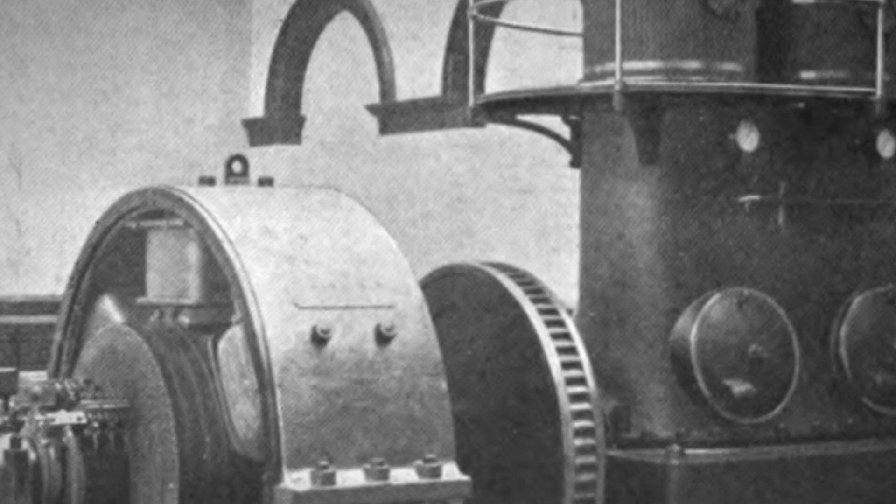In the spring of 1864, the Swiss Federal Council gave its approval for a project that promised to transform both a mountain and a nation's expectations of what machines could do. The plan called for a new kind of steam-powered engine, one that could cut directly through rock, timber, and anything else standing in the way of the St. Gallen-Toggenburg Railway. The men behind the machine were not local.

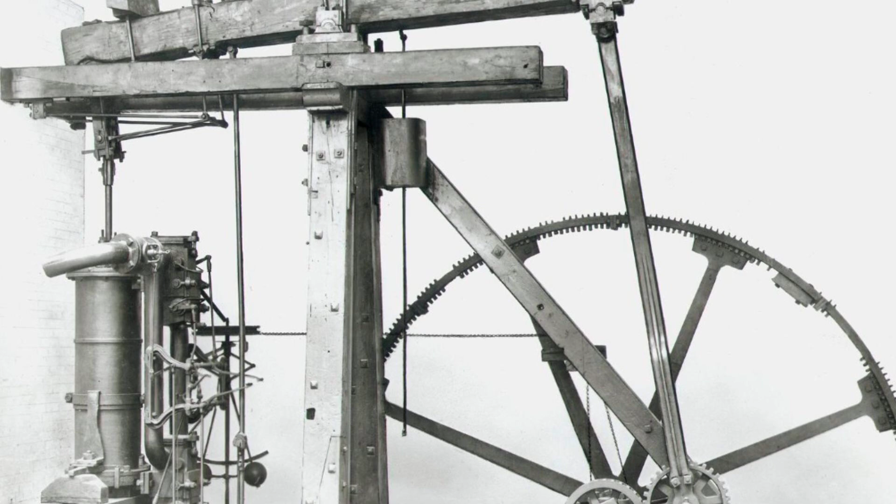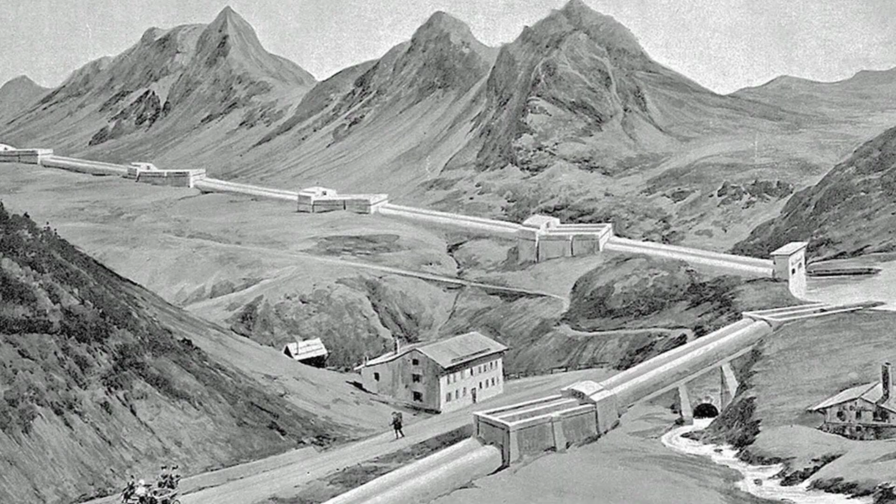James Miller, born in 1823 in Newcastle upon Tyne, brought years of experience with rotary steam engines from Britain's coal fields. Karl von Barton, born 1840, was the son of a German-Swiss family with a reputation for pushing engineering boundaries. Both men saw the mountain not as an obstacle, but as a challenge worthy of their ambitions.

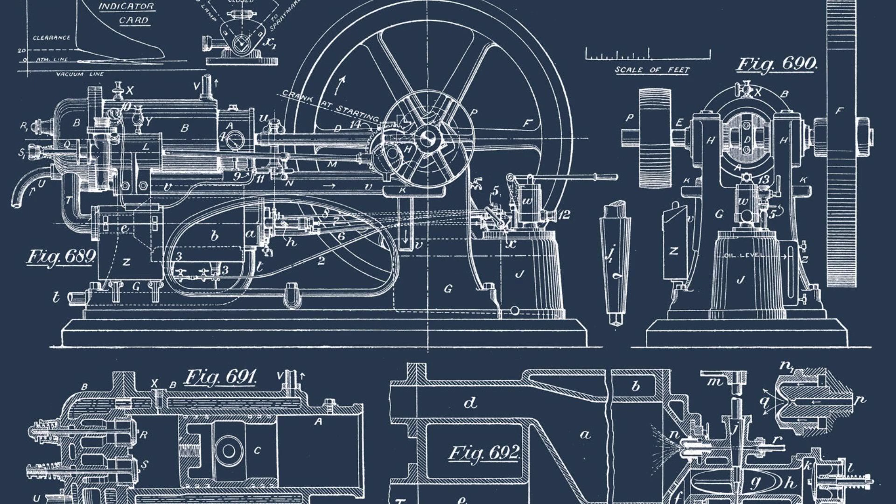Government records from that year show the urgency. The railway was falling behind schedule, and the cost of manual tunneling was spiraling out of control. The council's mandate was clear: find a way to cut labor time and risk, or risk losing the entire project. Miller and Barton responded with a design that looked more like a weapon than a tool.

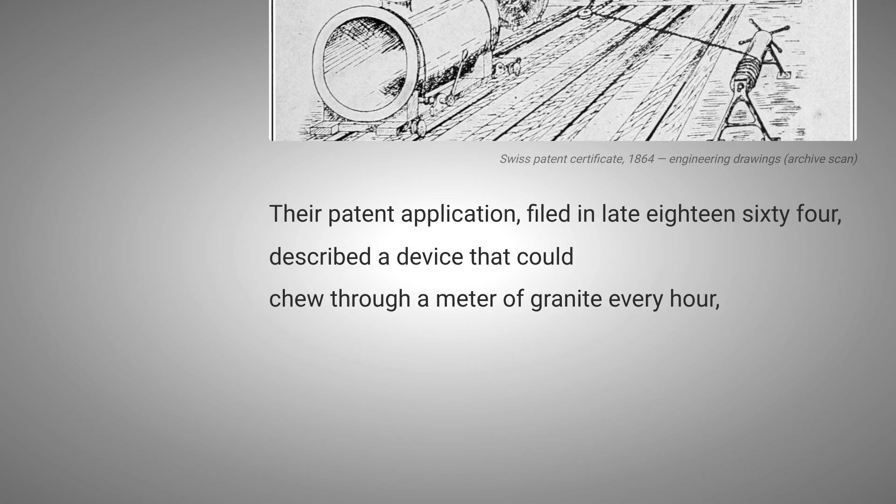A 30-horsepower double-acting steam engine, its boiler rated for 80 pounds per square inch, driving a 2-meter rotary steel blade. Their patent application, filed in late 1864, described a device that could chew through a meter of granite every hour, powered by a steady diet of coal and human vigilance.

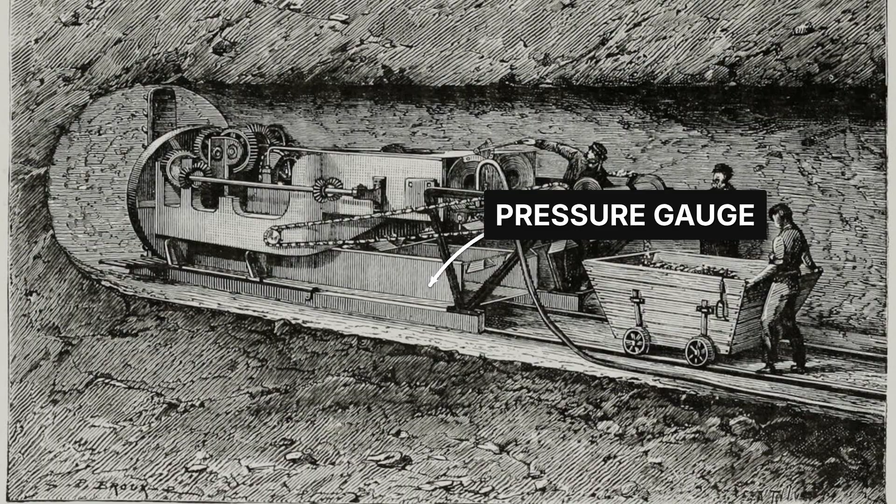On April 12, 1865, the first test took place at the tunnel's eastern mouth. The air was sharp and cold, the ground still frozen from a long winter. Miller stood by the controls, Barton watching the pressure gauge as steam hissed and gears locked into place. The blade spun up to 150 revolutions per minute, sending chips of rock and wood flying. For a moment, it seemed as if the machine would deliver exactly what the politicians had ordered.

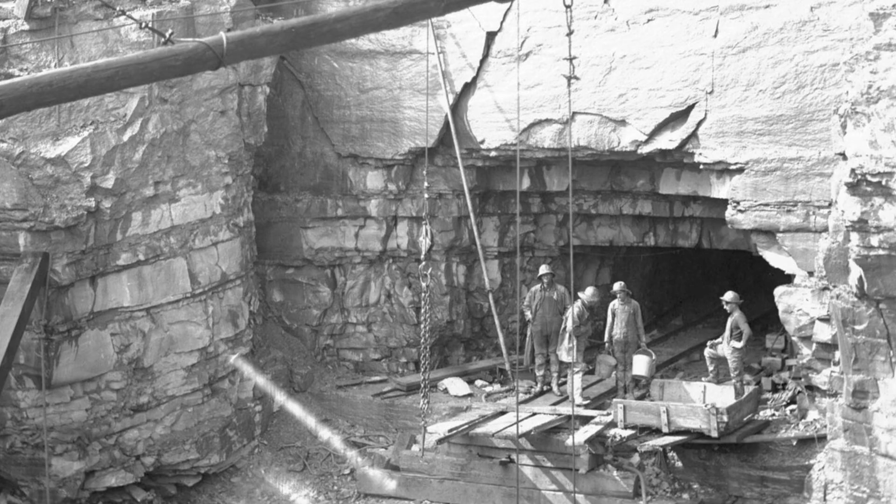But even in that first hour, the men on the ground felt the risk. The engine's roar drowned out warnings, and the exposed blade left no room for error. The promise of progress came with a cost that was already waiting to be paid.

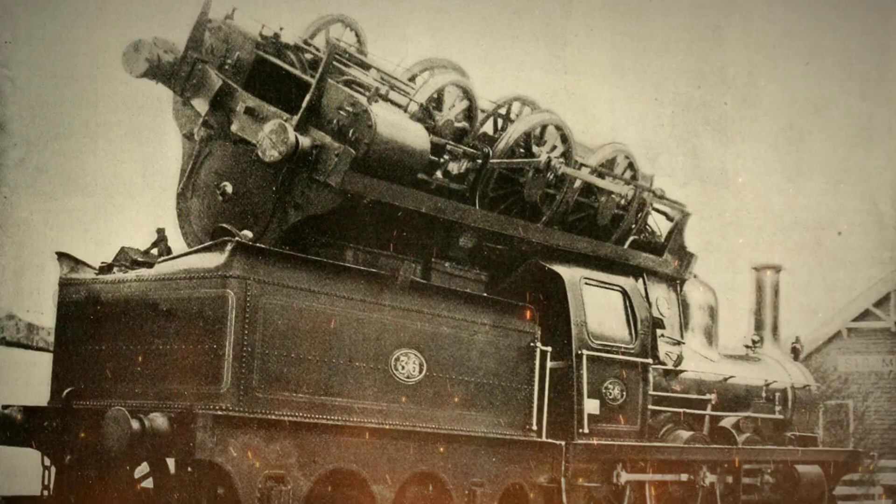On June 21st, 1866, the tunnel site fell silent for the first time since work began. The steam engine's boiler, pushed to its limits, ruptured without warning. Johann Keller, a foreman from Altstetten, was standing less than 3 meters away. The blast of scalding steam and shrapnel left no chance for rescue.

His death was recorded in the mining journal and in the hospital log at St. Gallen, where the entry reads simply: Keller Johann, age 34, deceased. Cause: crush injury, steam piston. The men who had worked beside him saw the ground stained with oil and blood, the promise of progress shattered in an instant.

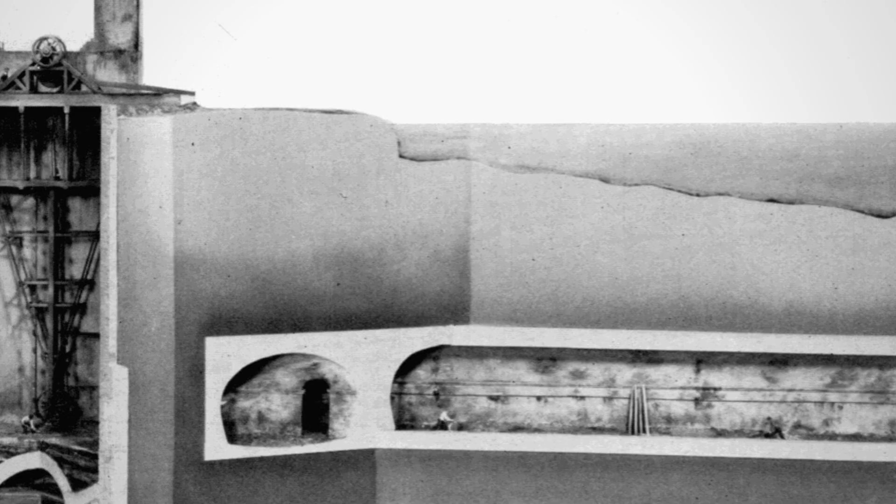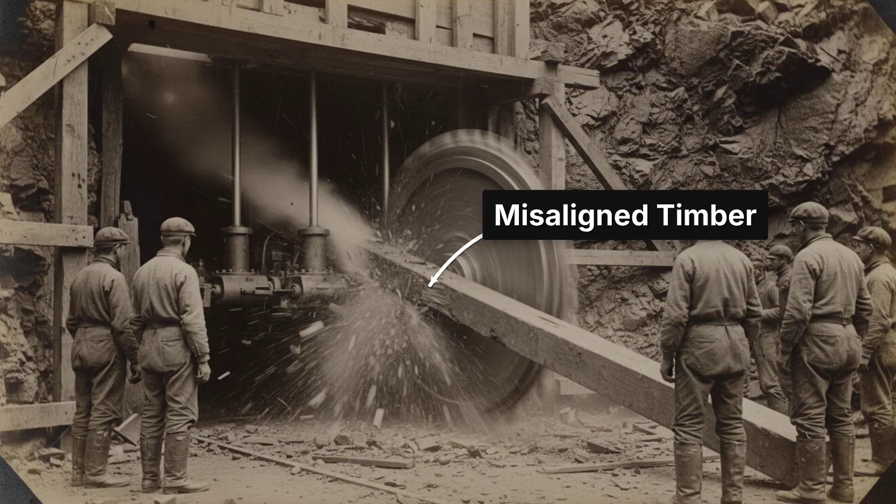The following year, on September 8, 1867, Marie Fisher brought lunch to her father, a brickmaker stationed at the tunnel mouth. She was only 16. As the rotary blade spun up to speed, a misaligned timber kicked loose. The blade caught it, sending a splintered beam across the worksite. Marie's left arm was severed at the elbow. She survived, but the hospital admission record notes: amputation required, permanent disability. Her father never returned to the tunnel after that day.

By late 1867, rumors of the machine's dangers spread beyond the valley. Mining journal entries grew darker, listing injuries by name, date, and wound. The hospital in St. Gallen filled with men burned, blinded, or missing fingers. In early 1868, the Federal Council ordered a halt to all tunneling operations. The shutdown lasted 3 months. Official records cite unacceptable risk to personnel.

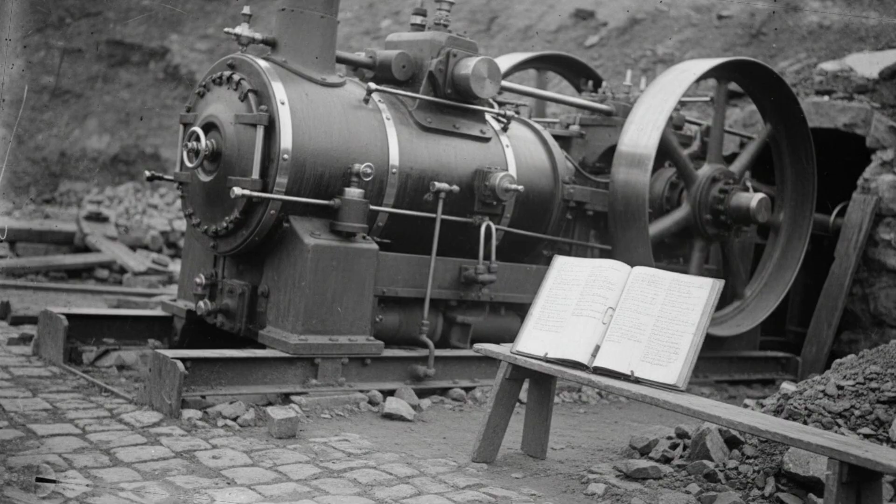Unfinished rock walls echoed with the memory of Keller and Fisher, and the promise of mechanical salvation now carried the weight of every injury logged in the company ledger. Each accident forced engineers and politicians to confront a question that had no easy answer. How many lives could be spent to clear a mountain?

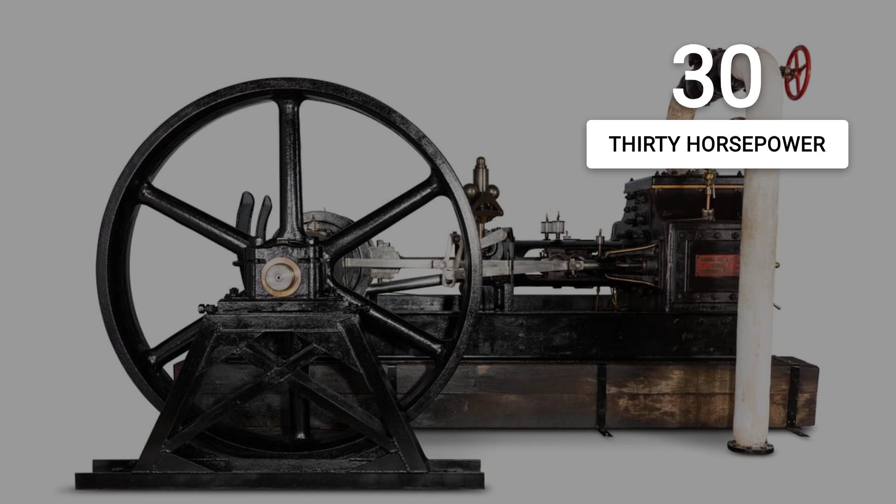A double-acting steam engine, rated at 30 horsepower, drove the operation. Its horizontal fire tube boiler, holding steady at 80 psi, demanded constant attention.

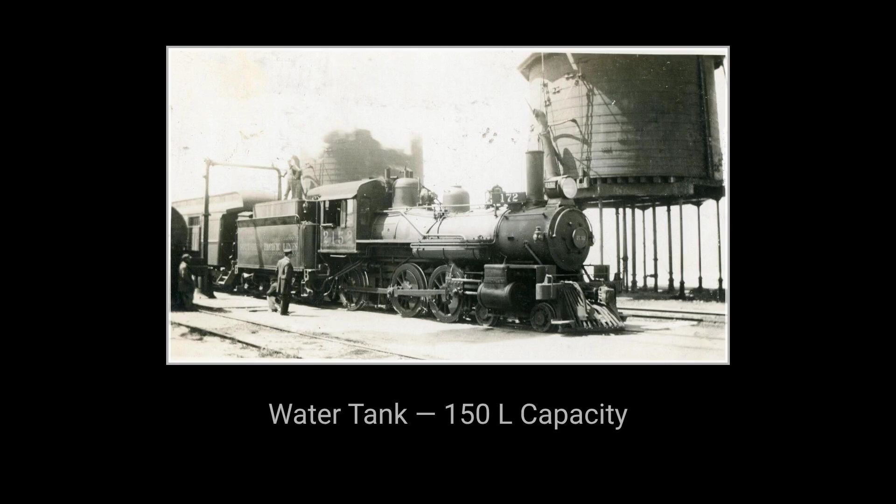Each morning, before dawn, the firemen shoveled 12 kilograms of coal into the firebox. The water tank, 150 liters, had to be topped off, every joint checked for leaks. Oil cans sat on a battered bench, each crankshaft bearing receiving 10 milliliters, measured with the precision of a surgeon. The engine's rhythm never faltered.

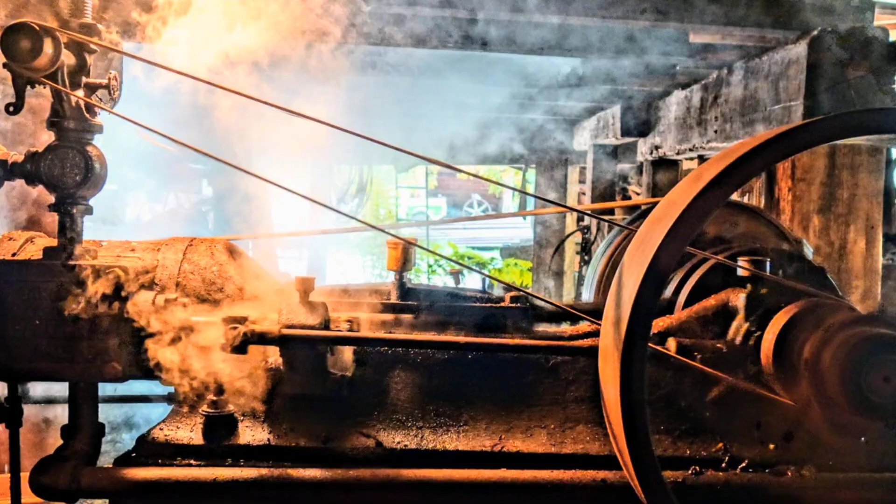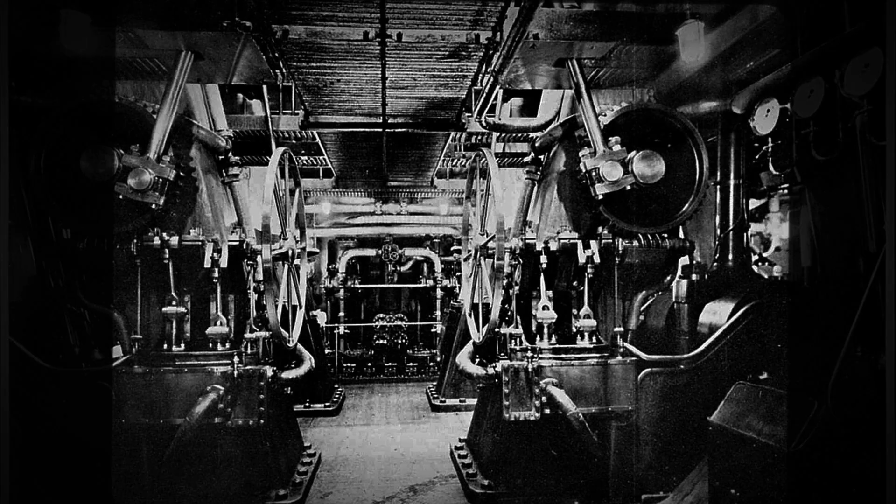The crew ran on routine and trust. 2 men at the controls, one on the throttle and feed lever, the other watching the pressure gauge and governor. Shifts rotated every 3 hours. The senior mechanic checked blade alignment twice a day.

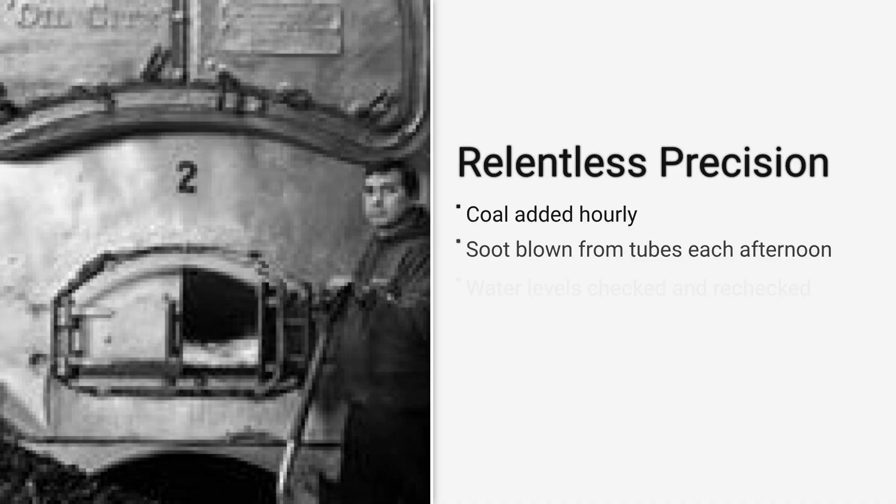The firemen's work never paused. Coal added hourly, soot blown from tubes each afternoon, water levels checked and rechecked. Any drop in pressure or odd vibration meant an immediate stop and a scramble to inspect gears or steam lines. The maintenance register, kept beside the engine house, recorded every adjustment, governor tension, gear backlash, blade runout.

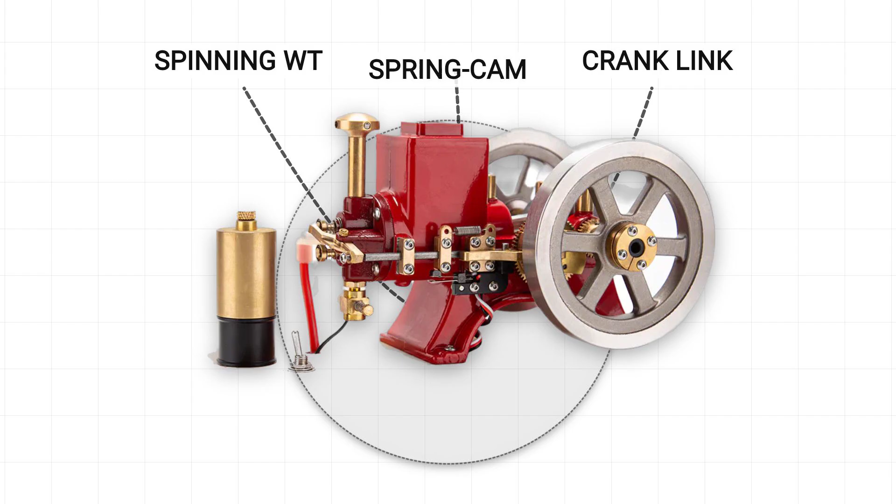On cold mornings, coaxing the boiler to working temperature took 45 minutes, faces already streaked with sweat and coal dust by the time the engine roared to life. Safety depended on a mechanical governor, a spinning weight linked to a spring-loaded cam ready to lock the crank link if pressure crept above 85 psi. The governor's set screw was checked at every shift, tolerance plus or minus 0.2 psi.

The machine demanded vigilance. The workshop logs, numbers, pressures, times, tell of a system that gave nothing for free and took everything the crew could give.

On the night of October 3rd, 1869, the mountain at Wolfenstein was slick with rain, the air thick with coal smoke and nerves. The crew had worked past sunset, driving the Miller-Barton steam saw up a temporary timber track built at a 2.8% grade, a slope steep enough to demand respect from even the most seasoned firemen.

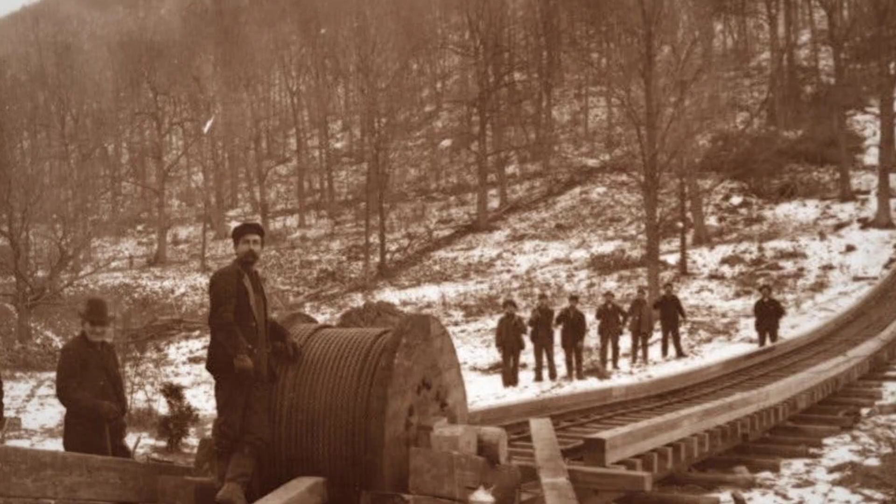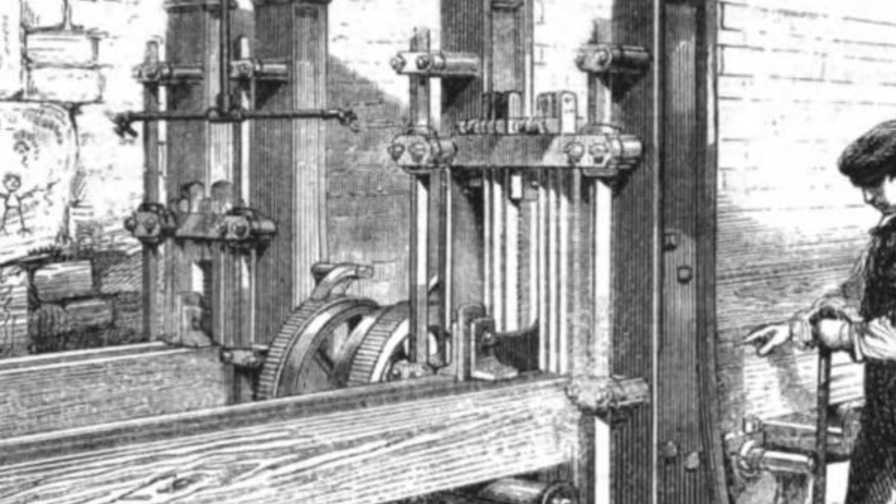At the controls stood Heinrich Schmid, 31 years old, sleeves rolled, eyes locked on the pressure gauge. The blade spun at 150 revolutions per minute, a blur of steel and heat. Every man on the crew knew the risk. They had seen blades warp, teeth snap, gears shudder under the strain. But tonight, the engine sounded true, until it didn't.

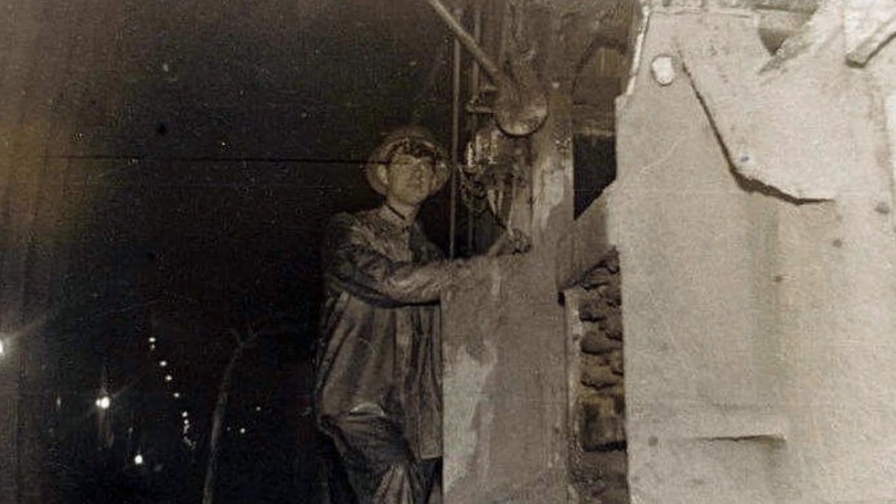At 8:47 p.m., a vibration rattled through the carriage. Witnesses later described a metallic shriek, sharper than anything they had heard before. The blade, 2 meters wide, sheared clean through its mounting bolts. Freed from the shaft, it whipped sideways, slicing through the timber frame. In the chaos, Schmid lunged for the brake lever, but the runaway carriage had already begun its slide.

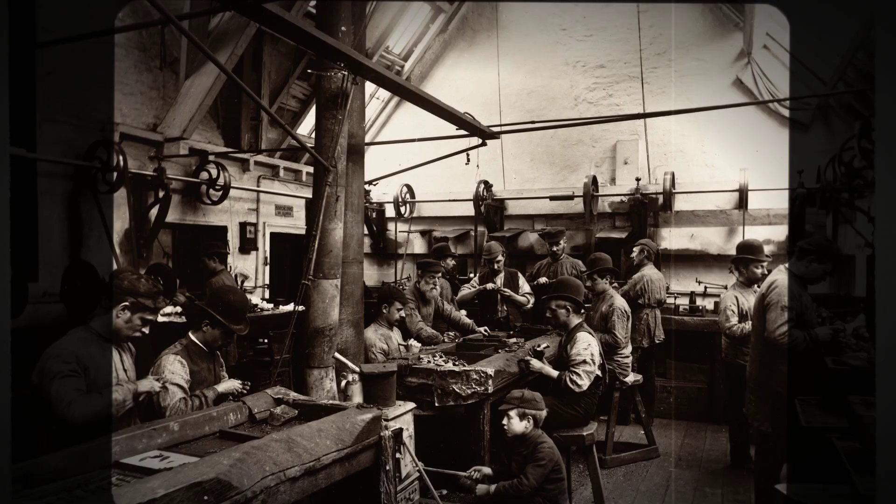The gradient turned gravity into an enemy. The saw, now a dead weight, dragged the entire assembly down the track. Sparks flew as iron wheels struck loose stones. Workers shouted warnings, but the noise drowned them out. The carriage picked up speed, slamming into a stationary supply wagon waiting at the next bend. The impact tore the rotary engine from its moorings, hurling steel and timber across the worksite.

Schmid was pinned beneath the wreckage, his final moments recorded only in the accident log. Schmid, Heinrich, fireman, deceased. 12 men died that night. The official report listed causes: blunt trauma, laceration, crushing injuries. The numbers told only part of the story.

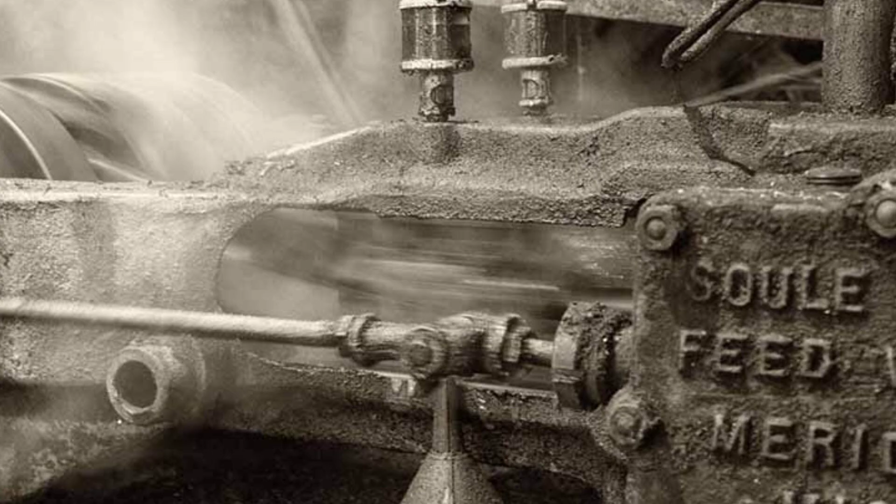Survivors spoke of bodies thrown from the carriage, of the saw blade embedded in the embankment, still humming with residual heat. The timber track, meant to be temporary, had become a trap. No one at Wolfenstein would forget the sound of steel failing under pressure, or the sight of a machine built for progress turned into an instrument of disaster.

By dawn, the site was cordoned off. Investigators measured the slope, cataloged the debris, and counted the dead. The rotary saw era ended in a tangle of broken machinery and shattered lives. The mountain was quieter, but the cost of that silence was written in the names etched into the hospital ledger and the memory of every man who had worked the night shift.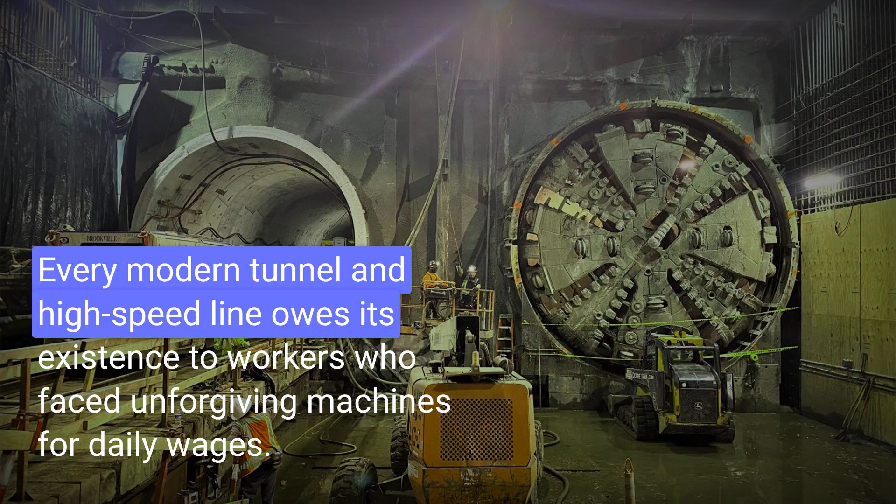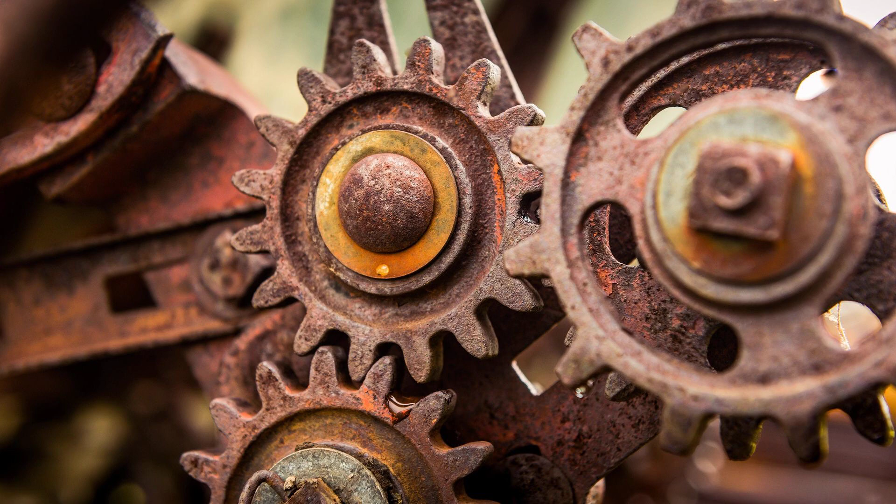Every modern tunnel, every high-speed line, owes its existence to workers who faced unforgiving machines for daily wages. Today, automation promises safety, but human risk never disappears, only shifts. Progress demands a price. The only question? Who pays it next? Share your thoughts in the comments below.